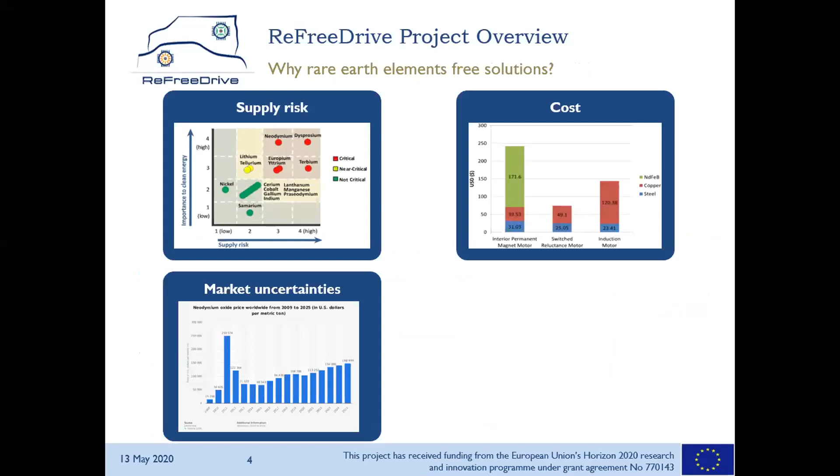Why are we so keen to avoid rare earth elements? Well, there are supply issues, there are cost issues, there are market uncertainties, and nevertheless, there are environmental LCA issues.

Supply risk: if we talk about rare earth permanent magnets for electrical vehicles, on the upper right we see the 2 elements, neodymium and dysprosium, which are the main elements used in today's permanent magnet machines. But they're not only for electrical vehicles, they're also highly important to other green technologies like wind turbines, so there's increasing demand all over the place. And on the other hand, the supply base is very much limited and concentrated in Chinese hands. Over 95% or even more is coming from China.

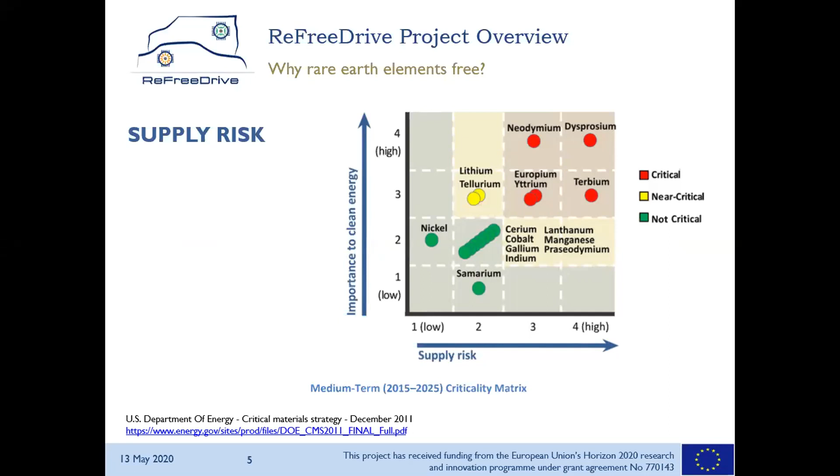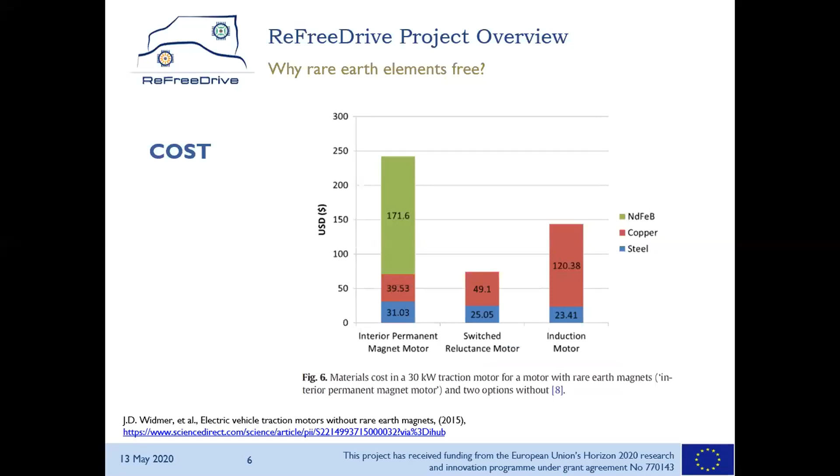The costs are an issue, obviously. So the cost proportion, depending on which study you're citing, is a significant part of the total motor costs.

There are market uncertainties, which are even more important than the absolute cost. We had a price peak in 2011 for neodymium dramatically, because Chinese export supply abroad was periodically stopped or limited. So there's high uncertainty how this can evolve and how this can affect long-term supply contracts.

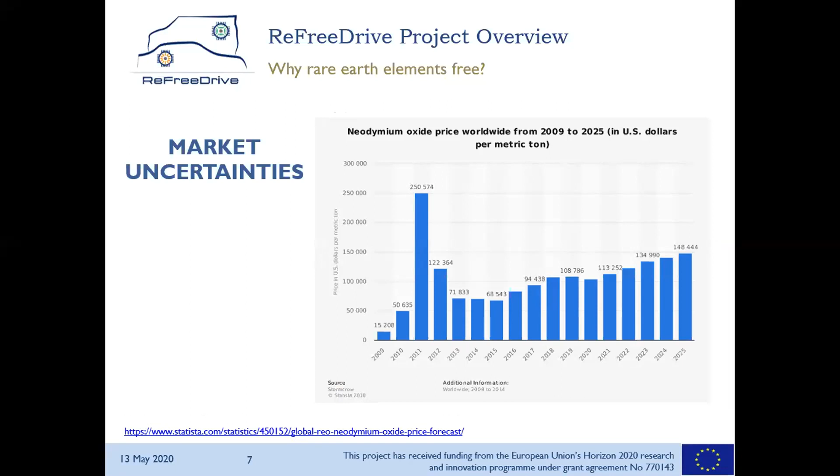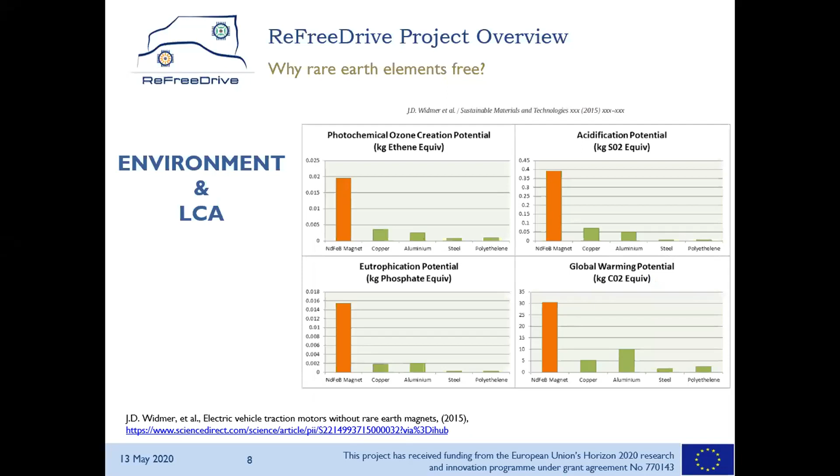And nevertheless, there are the environmental and LCA issues. These elements like neodymium have a high global warming potential, so a relatively negative CO2 footprint, and there are other issues like recycling and recovery still unsolved.

But of course you can ask, okay, what about other elements? Do we run from one criticality, avoiding neodymium, to another criticality if we put more copper into the motor? Well, short answer: no. Copper is not a critical material. Today, you see it on the right side of the chart.

There's at least 30% of copper coming from recycling, from the secondary route. In some regions like Europe, this could easily go up to 50% or even more. There are still a lot of reserves, discovered reserves, but also a lot of resources and identified resources, which, according to geological analysis, provide up to 250 years of copper.

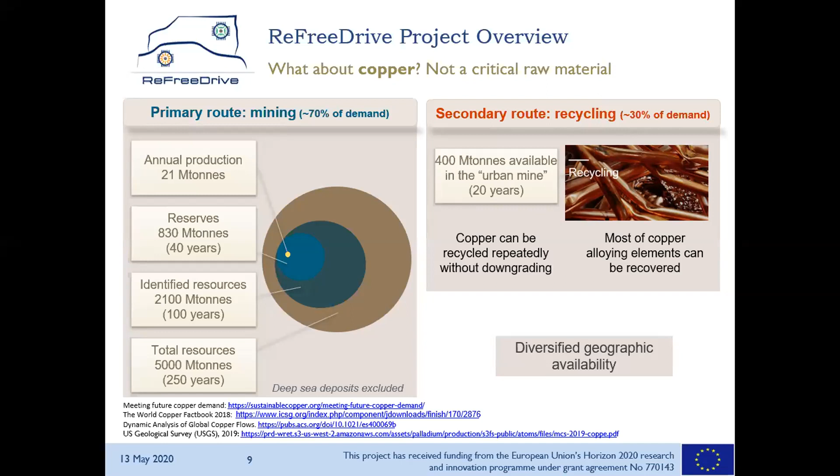The main objective of ReFreeDrive is not only to fulfill an academic task, but to prove that our solutions, which avoid rare earth elements, are industrially feasible, can be easily transferred to mass production, and ultimately also save costs.

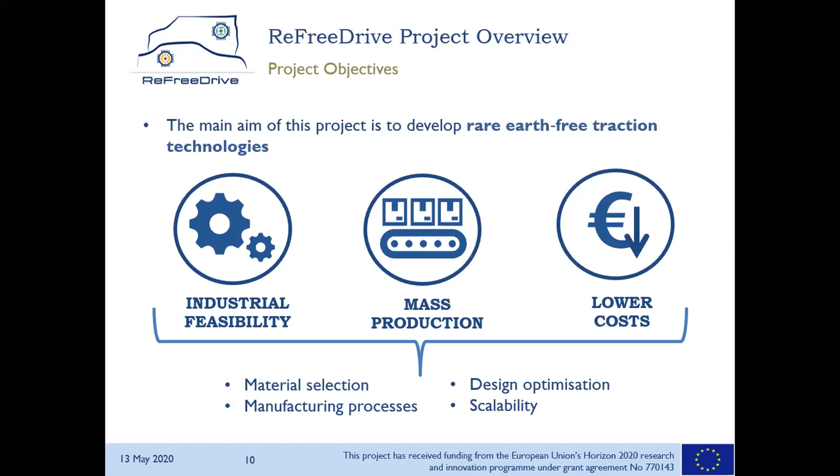We do this through clever material selection. We analyze the impact on the manufacturing processes. There is design optimization, which is the main topic today of the three speakers following. And we also intend to present a scalable solution.

In total, our project will develop and manufacture 4 different physical e-motor prototypes. There are 2 induction machines, one with a fabricated copper rotor, one with a die-cast copper rotor, and there are 2 versions of the synchronous reluctance machine.

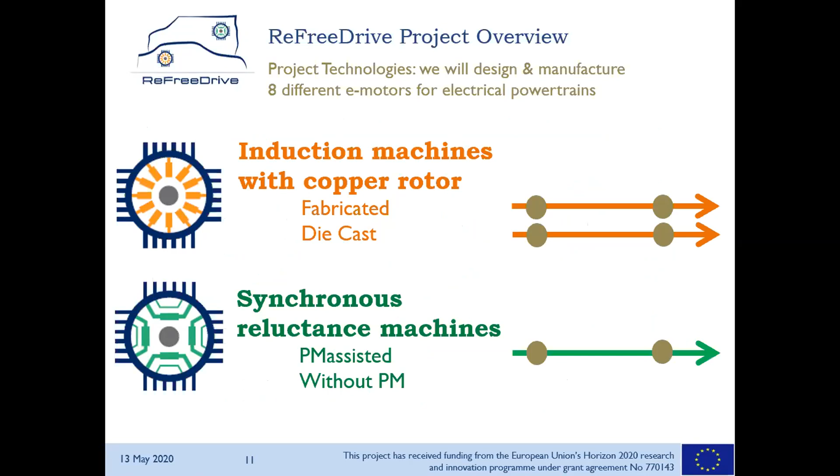One has a permanent magnet, but these are not rare earths, these are low-cost ferrites, so no critical materials. The second SynRel technology doesn't use any magnets in the motor core. And we will present the solutions for 2 power classes, 75 kilowatts and 200 kilowatts. As I said, our solution is scalable, so we could theoretically realize any power motor class in between.

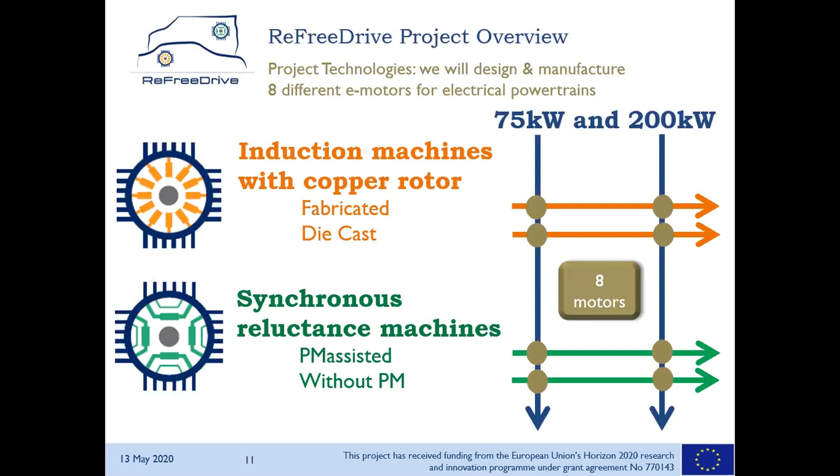Our main benchmark when developing the proposal for the project was the Tesla S60, which is an induction motor, but with a relatively high volume and a good awareness in the market. We intend to be 30% better regarding specific torque of the motors. We want to reduce the direct motor losses by 50%, meaning we're aiming for a motor efficiency of 96% plus.

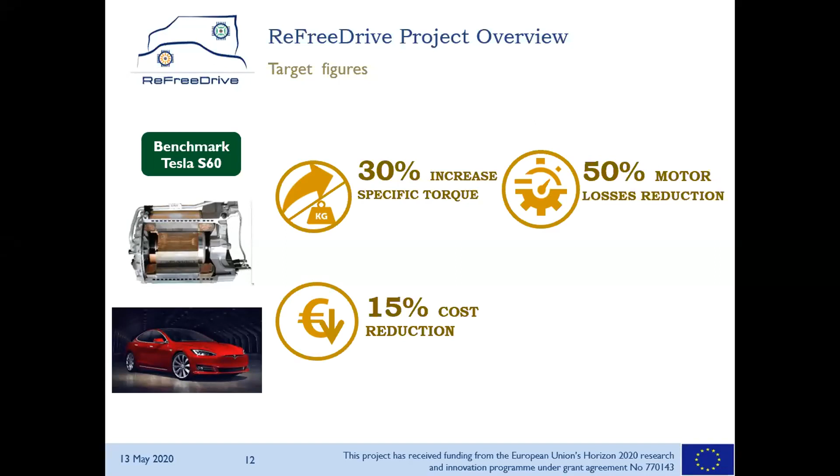As said before, cost reduction in mass production is an important issue. 15% is a target, and ultimately a 50% increase of power density in the power electronics, also to offer a relatively compact package.

Now, design optimization has been finalized. We have started to manufacture the 8 physical prototypes, which is somehow on hold, or slowly now going on. But all these 8 prototypes, induction and SynRel, 75 kilowatts, 200 kilowatts, will be then tested on motor test benches. And in a later stage, at least 2 of the 75 kilowatt motors will be integrated into a standard LCV and tested under driving cycle conditions at Perugia circuit in Italy.

We hope to show real test results towards the end of the year, in order to prove what the 3 speakers will now present as calculated performance also proves in real life tests.

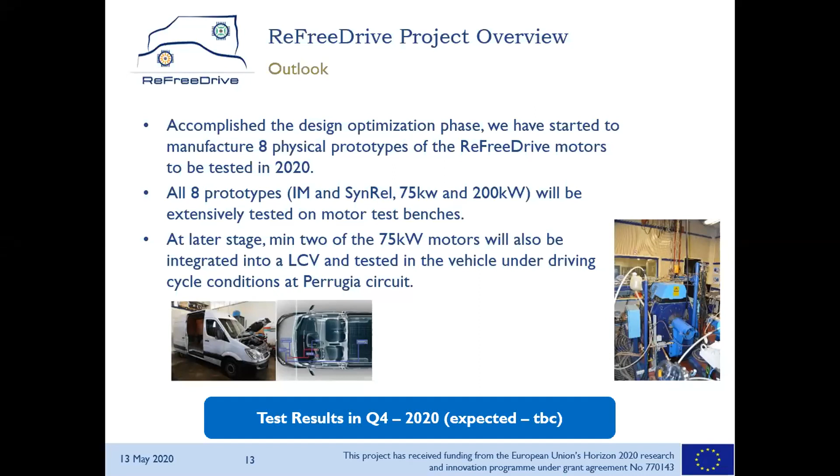You can find much more information, latest scientific papers we published, or presentations on our website, www.ReFreeDrive.eu, and also on the LinkedIn cluster page we joined with the other GV04 projects.

This is number 1 today of our planned webinar series. So we will talk about motor design. There are other topics on the agenda for further webinars: power electronics, the manufacturing process, the real test bench results, techno-economic analysis, and ultimately life cycle assessment. So stay tuned with us, and hopefully you can join one of the next webinars as well.

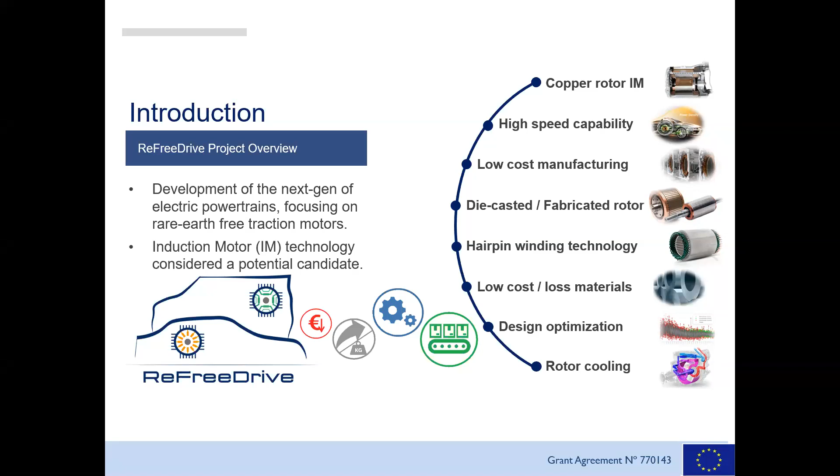Trying to maintain low-cost manufacturing, we looked at two possibilities to build the copper cage of this machine: one using a die casting procedure, the other a fabricated solution. For the stator winding, we decided to investigate hairpin winding technology, and I'll mention briefly why we did this, then look at different low cost materials. Last but not least, we optimized the design while also considering cooling of this machine.

These are the specifications valid for all the machine designs you'll see today. They are based on specifications coming from Jaguar Land Rover, the OEM partner in this project, and the target vehicle was this Jaguar XJ MY21 with the different performance requirements listed here.

Cooling as well, and power electronics. What is important to note, I'm not going to go through all the numbers, but it's important to note this value: peak torque 370 Newton meters, peak power 200 kilowatts, maximum operating speed up to 20,000 RPM, cooling system using liquid cooling.

In our case, it will be a water jacket with spiral cooling. And from the supply point of view, you notice we have the availability of a high voltage, 650 to 720 volts, while the current available from the inverter is up to 500 amps RMS. While the envelope of this design is listed there: diameter of 250 millimeters for an overall length of 325 millimeters.

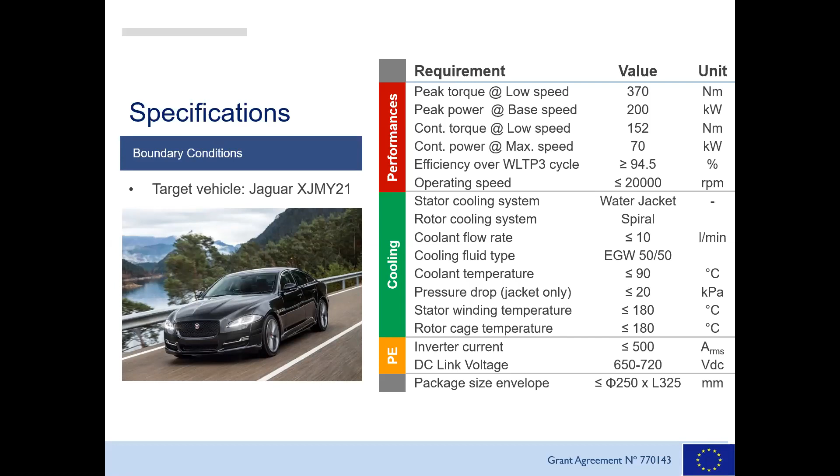Further, obviously, this project is supposed to improve upon the existing solution on the market, and we took as reference the Tesla 60S motor that is used in the Tesla vehicle, for which you can see the specifications given here: specific power, power density, specific torque density, and peak efficiency, and what we have to achieve with reference to the Tesla vehicle.

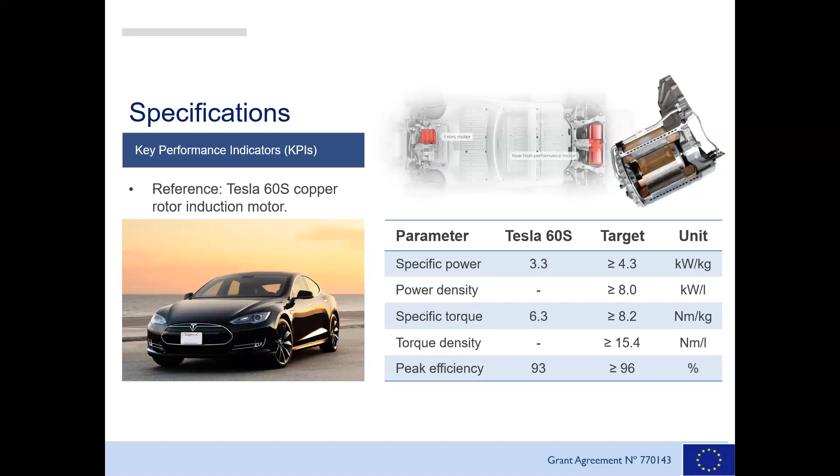So what we did to get our design, we made use in these calculations and optimizations of two tools, MotorCAD and OptiSlang. The reason for this is because they are fast and accurate, and will help us in getting an optimized design for this induction machine.

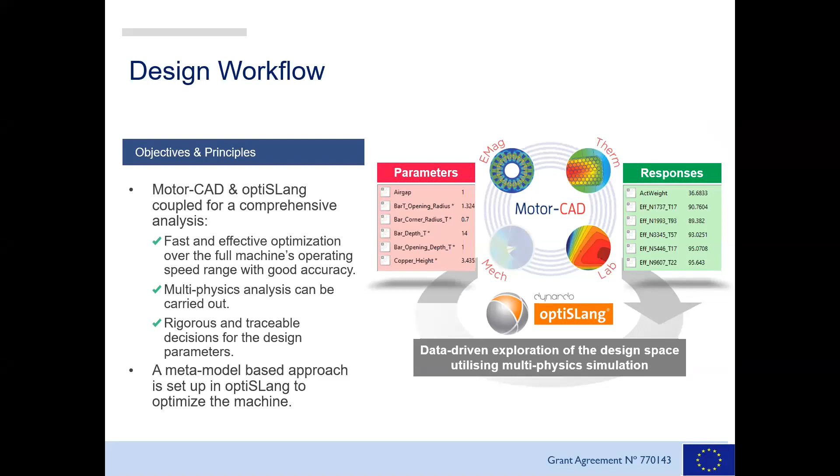The process is illustrated in this slide. We start by doing a sensitivity analysis. Based on this, which is point number 1, we get a meta model from which we can investigate the influence of different parameters on the performance of the machine. Then we optimize and get a solution that we validate using specific calculations, Motor-CAD validations, using the software mentioned earlier.

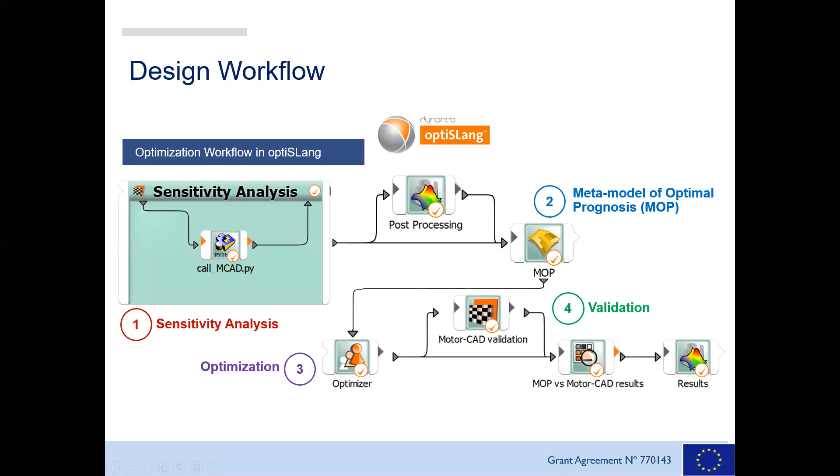So from the optimization design workflow, we have tackled and considered at the same time two aspects of machine performance: one is the electromagnetic performance, and the other one is the thermal performance.

How we model the performance of the machine: magnetically, we make use of the equivalent circuit given there, a standard T circuit. You can recognize the elements of a per-phase equivalent circuit for an induction machine, all of which are calculated using either analytical algorithms or finite element procedures.

From the thermal point of view, we made use of a lumped parameter thermal network given in that lower right diagram. For each candidate design, it takes about 10 minutes to calculate the performance, and the meta model was making use of 400 candidate designs, upon which we later generated an optimization solution.

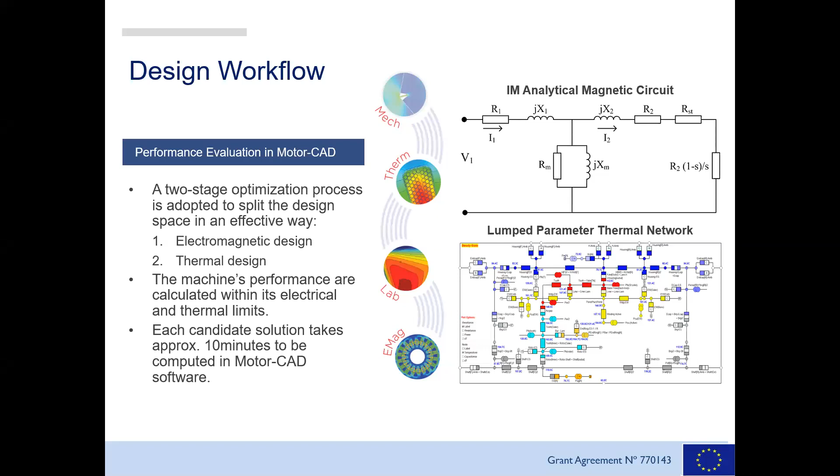Because we are discussing an automotive application, we have to consider a certain drive cycle, and in our case we decided to make use of the WLTP3 drive cycle. This is a world harmonized duty cycle recognized worldwide. And how did we make use of this drive cycle?

This drive cycle has 1,800 points to consider, so it takes a lot of computational effort to take all the points into account. So we decided to pick a few clusters. You notice from the color code, we picked one point for the high-speed solution in the pink area, another point for medium, one here at low rotational speed. And as well, we considered two other points at a relatively low speed, but with medium and high torque demand.

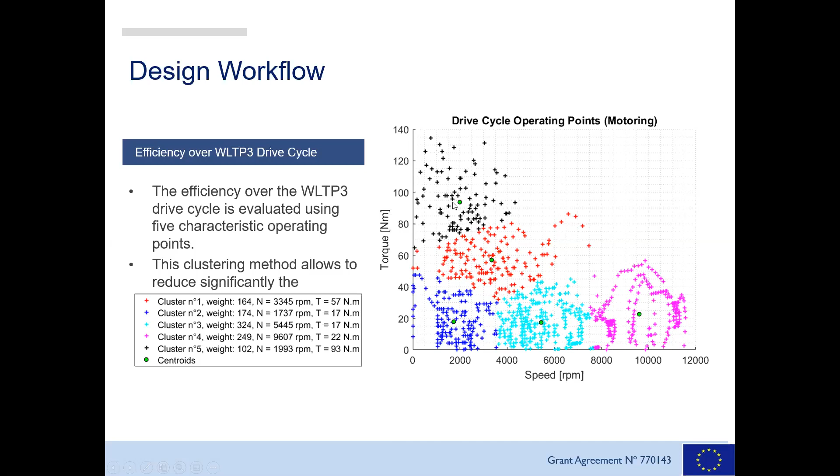Then from the electromagnetic design point of view, you can see on the screen right now the solution we selected in the end. It's a 4-pole machine with 36 stator slots and 50 rotor bars. The rotor bars are closed, while for the stator, you notice they are all parallel slot because we are going to use hairpin winding.

For the design of this machine, we investigated and considered different electrical steel materials given there, from thin gauge steel NO30-15, which is 0.3 millimeter thickness, NO20, 0.2 millimeter thickness, M235-35A, which is 0.35 millimeter thickness, and M290-50. Based on this analysis, we selected the M235-35A, given as well on this slide, as the final solution for the electrical steel.

For the copper materials, obviously the winding is made of pure copper. But for the rotor cage, two materials: copper ETP for the die-cast solution, and copper silver with 0.04% content of silver for the fabricated rotor cage.

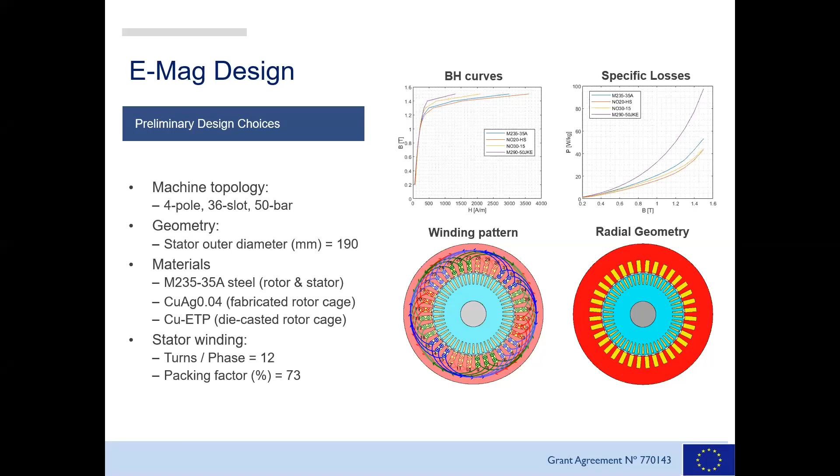From the magnetic point of view, to optimize the design, we considered certain parameters to optimize, and they are given here. You notice we look at the active length, mechanical air gap, split ratio, which is the ratio between stator bore and stator outer diameter, slot depth ratio, width ratio, bar opening depth, bar depth ratio, bottom bar, and top bar width ratio, with images illustrated on the right-hand side of the screen.

Important to note, in optimization it's important to use these ratios to make sure that all the geometries are feasible.

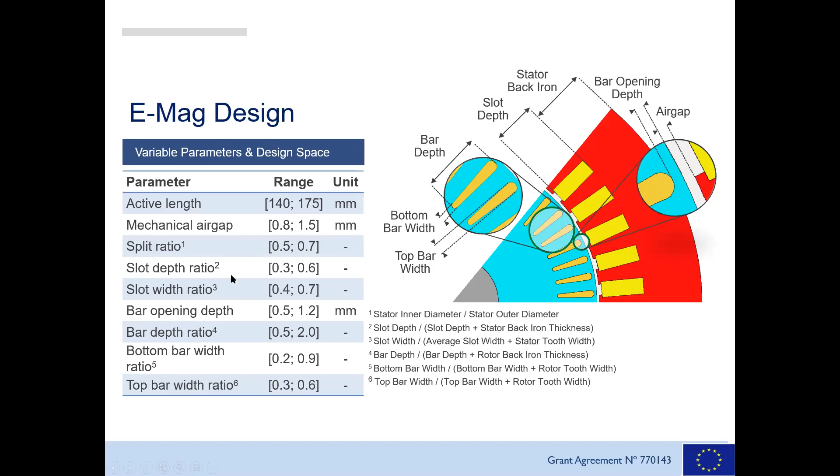And these are the results from the magnetic point of view. What you see here are efficiency maps, torque versus speed with the efficiency loci on the left-hand side, and power versus speed on the right-hand side. We noticed that we achieved the torque demand without any problems.

The required 200 kilowatt maximum output power is achievable for quite a large speed range, from about 5,000 RPM all the way to 15,000 RPM, with a short peak up to 300 kilowatts. The maximum efficiency for this drive cycle was just above 95%.

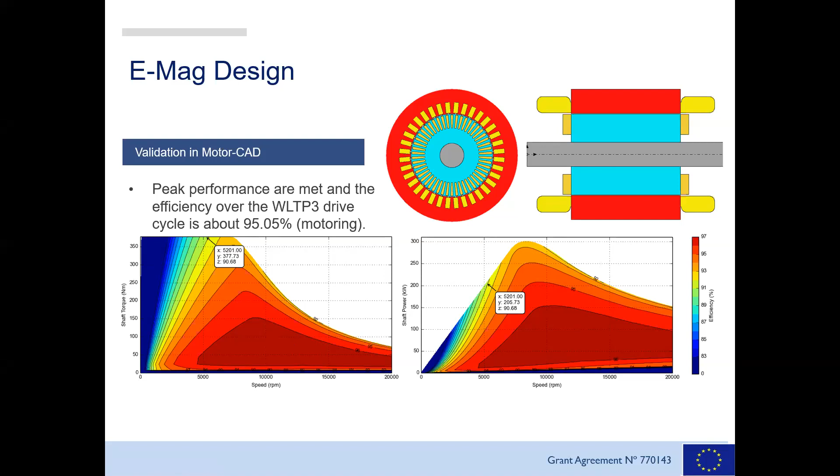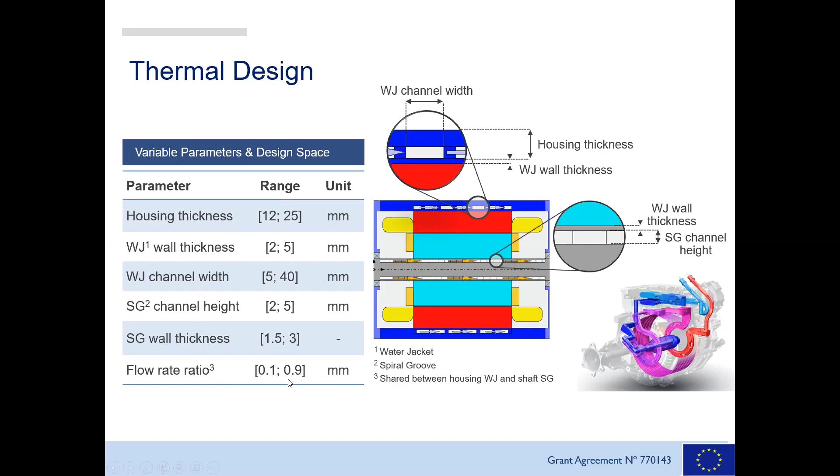So there's a series connection between the two cooling systems using water ethylene glycol mixture, 50-50%, while arranging these parameters: housing thickness, water jacket wall thickness, channel width, spiral groove channel height—this refers to the shaft cooling—and the flow rate ratio.

The thermal design was giving us what you see now on the screen. This is what we call continuous performance, meaning that the machine is capable of delivering the performance without exceeding 180 degrees centigrade for the stator winding and 200 degrees centigrade for the rotor bars.

You notice that this machine is capable of delivering continuously a peak torque of just above 160 Newton meters and continuous power of above 120 kilowatts.

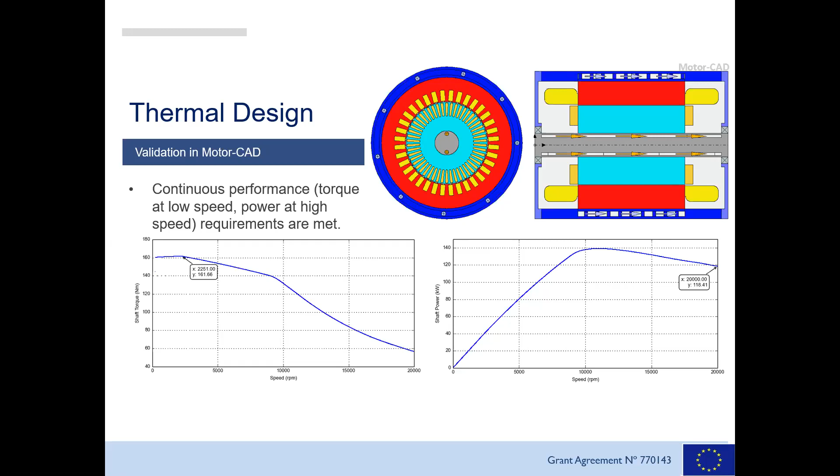On the prototyping, we are making good progress, even given the actual conditions with the coronavirus. The consortium still managed to build different elements of this machine.

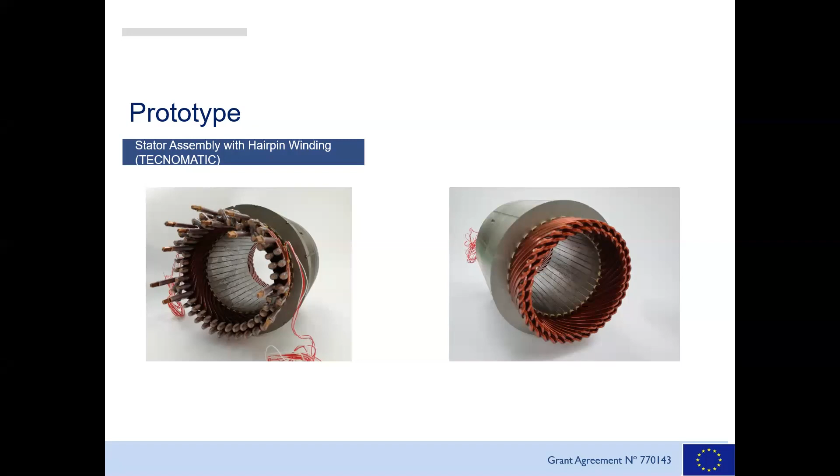What you see here is the stator assembly with hairpin winding, courtesy of Tecnomatic. It's a winding with 4 conductors per slot, and you can see we have also installed thermocouples so the temperature of the machine can be monitored.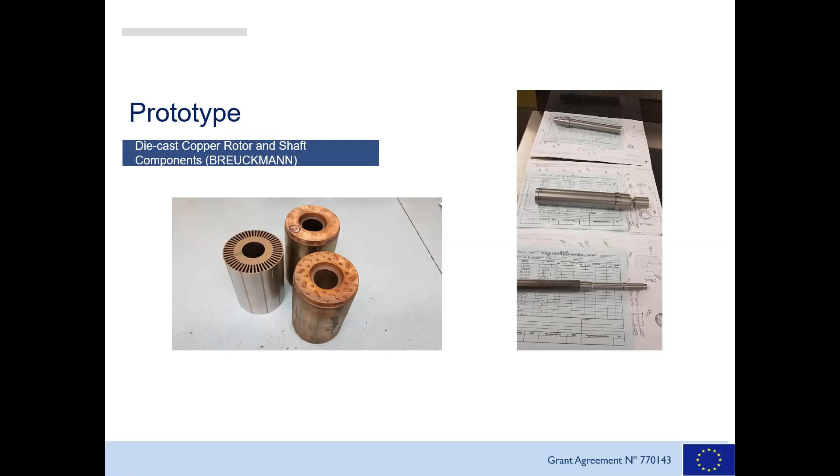Conclusions: we looked briefly into a solution for a 200 kilowatt peak power, 20,000 RPM copper rotor induction machine for a traction application. Optimization was achieved using ANSYS MotorCAD and ANSYS Suite software, and the solution comprises hairpin winding, die-cast fabricated copper rotor cage, and a series cooling fluid circuit for the shaft, stator, and inverter box.

The optimized motor is currently being prototyped, and hopefully we'll be able to test it later this year. The same design can be scaled for a 75 kilowatt, 12,000 RPM version for integration in a lower power vehicle powertrain.

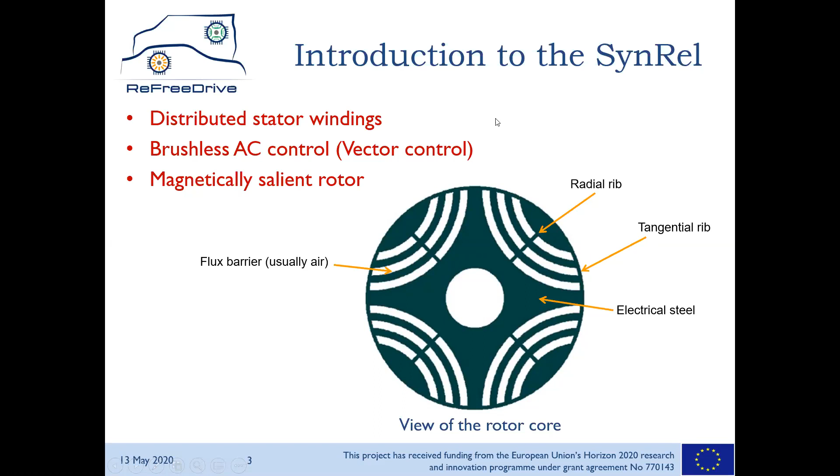Therefore, to satisfy the high requirements imposed by the application, it is necessary to achieve high magnetic saliency. The synchronous reluctance motor could be a valid alternative for electric and hybrid vehicles due to its simple and rugged construction. It has been selected as a rare earth-free motor solution for the next generation of electric powertrains.

The general advantages of the synchronous reluctance motor are the absence of windings and magnets in the rotor, allowing low inertia and good acceleration performance, and less cooling requirement, because the losses in the rotor are smaller than in other types of machines.

Moreover, it is attractive from an economic point of view, making it very suitable for household and consumer appliances because it's easy to manufacture. The disadvantages with respect to permanent magnet motors are a lower power-to-weight ratio and a lower power factor. It requires an accurate design to reach very high performance, and there is complexity in control.

Like permanent magnet motors, it requires a field-oriented control, but it has a non-linear torque-current behavior.

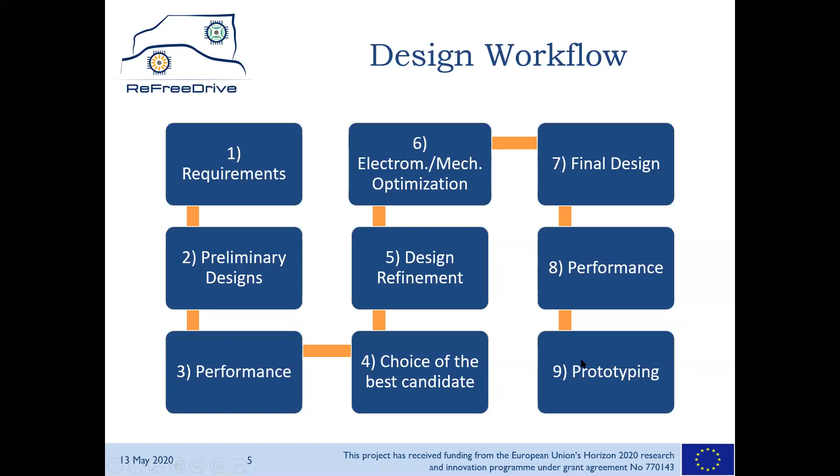The requirements are based on the Tesla Model S, with an increase of 30% of the performance. The requirements are the same as those my colleague showed in the previous presentation, but it is worth noting the high specific peak torque and peak power for this type of motor, the synchronous reluctance motor.

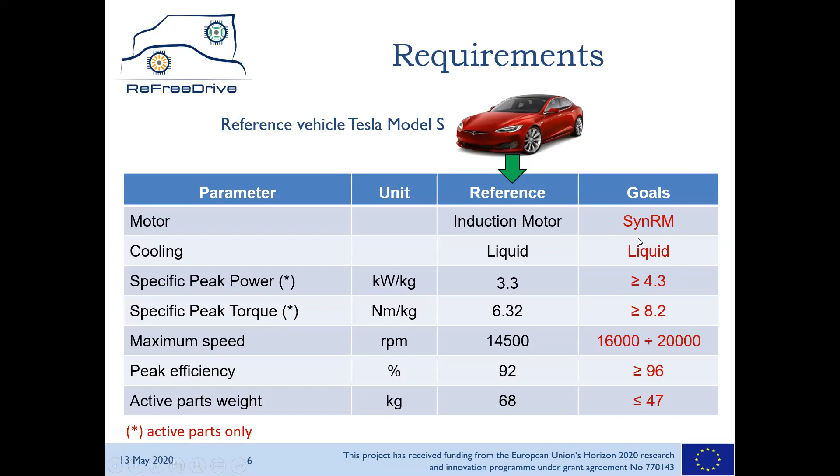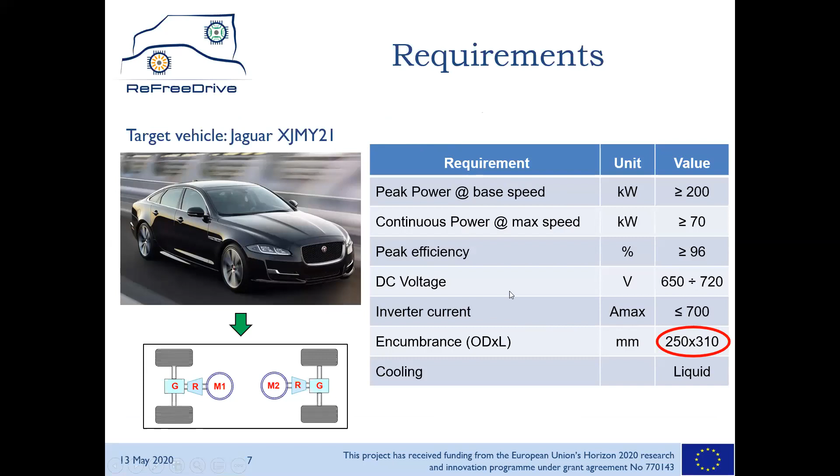To reach these severe requirements, the fluid shape barriers have been chosen to improve the overall performance of the motor, because they offer a very good saliency ratio and reduce the torque ripple. Moreover, the fluid shape is easy to optimize since it requires fewer variables, because it is already an optimized shape.

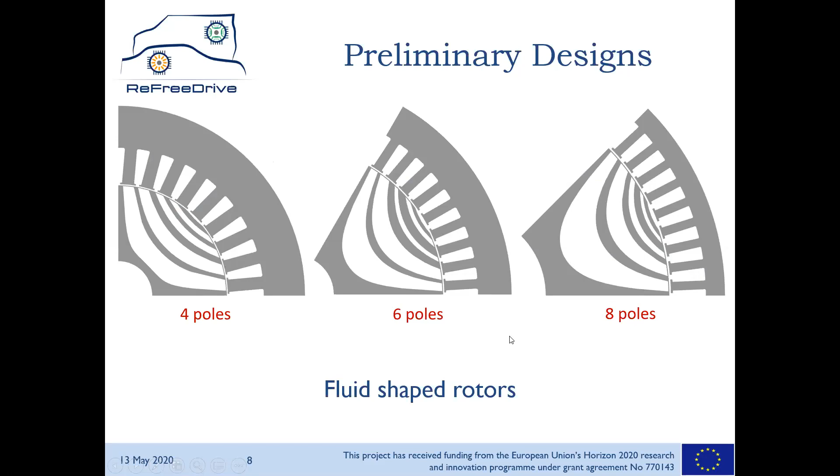The six-pole solution has the highest peak power at base speed of 280 kilowatt and the highest continuous power at maximum speed of 110 kilowatt. Its efficiency is in the middle of those of the 4-pole and 8-pole solutions, with a value of 97.6%. For this reason, the 6-pole solution has been considered the best candidate for further refinement.

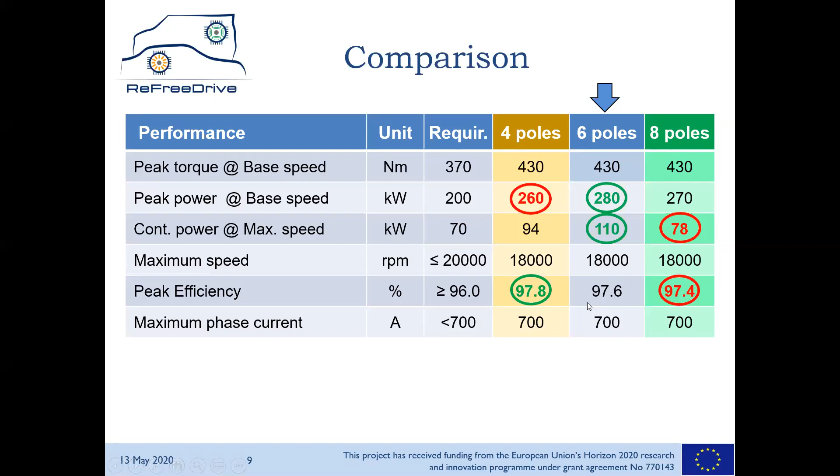In order to guarantee the structural integrity at high speed, radial ribs have to be introduced. The introduction of radial ribs degrades the performance of the machine. Larger are the radial ribs and tangential ribs, and lower is the saliency ratio of the machine, and so higher the degradation of the performance.

In order to minimize the mass of the tangential and radial ribs, guaranteeing the structural integrity, a topology optimization is used. The topology optimization is a tool commonly used in mechanical design that is able to minimize the material needed to withstand the mechanical load.

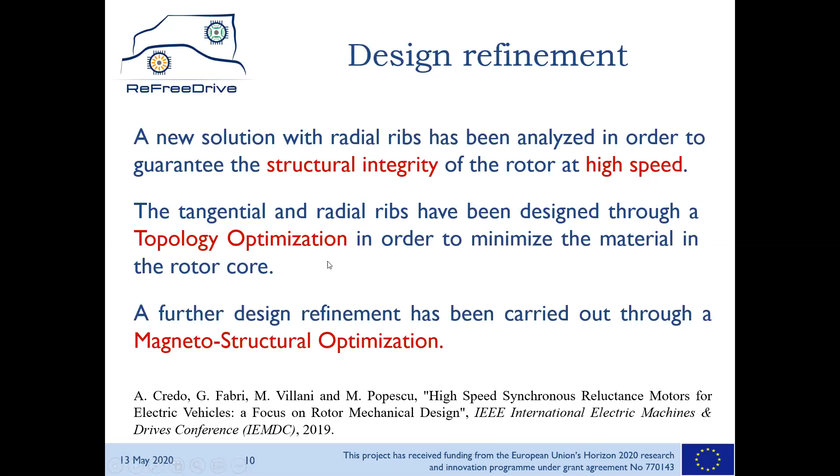The study of the topology optimization has been carried out on the 6-pole design. A further magnetostructural optimization has been carried out on the shape obtained by the topology optimization. The results of the process has led to a new rotor layout with asymmetric shape and multiple ribs in different positions with respect to the flux barriers. These multiple ribs connect the segments to each other axially and transversally. It is worth noting that this procedure leads to a quite unusual design compared to those reported in literature.

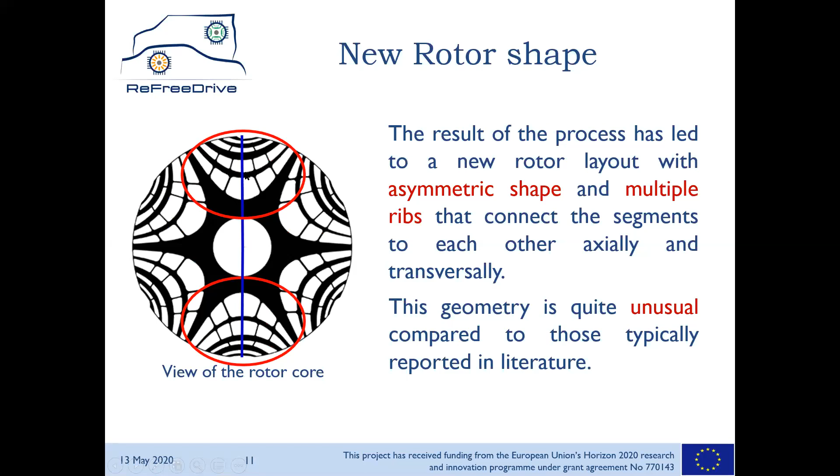The final design is able to satisfy all the requirements. The specific peak power is widely satisfied, and the specific peak torque is satisfied with a value of 8.4. The mass of the active parts and the peak efficiency are also satisfied. The active parts weight is 46 kg, and the peak efficiency is 96.4%.

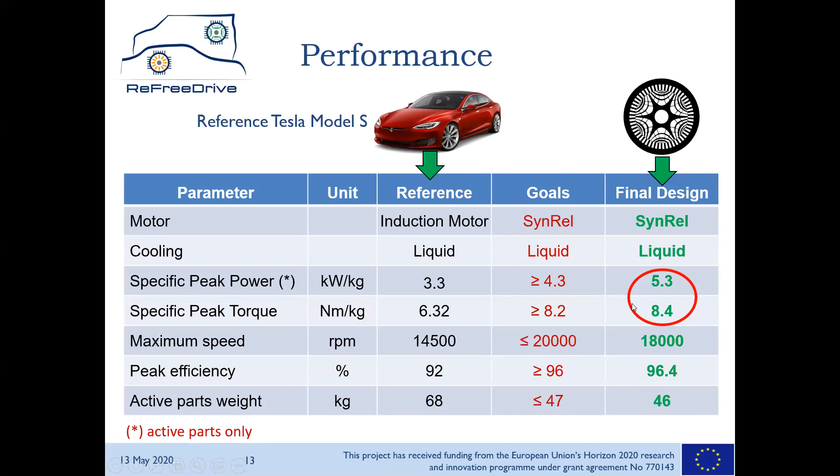The torque ripple is low, considering the type of machine, 4% in the peak power operation and 10% in the continuous power operation at the maximum speed. The skew angle is set to the angle of the stator slot.

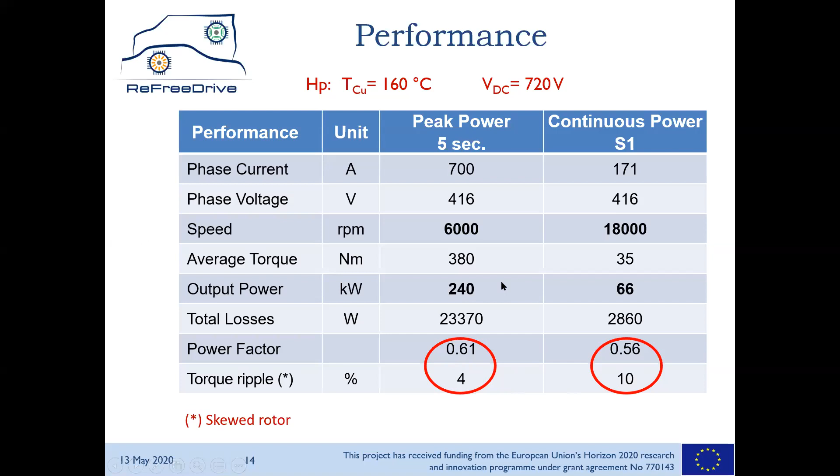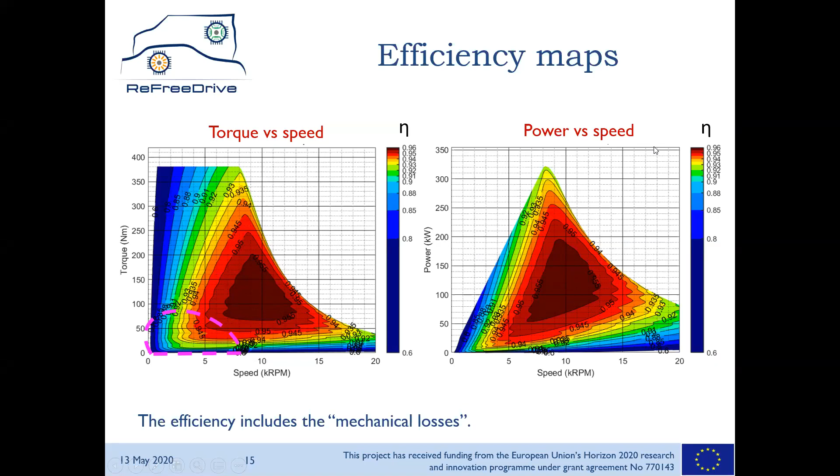The tangential ribs work in a bad direction with respect to the centrifugal forces, and the topology optimization has moved the radial ribs from the center of the barrier toward the tangential ribs in order to help the mechanical integrity. The ribs maintain enough mechanical integrity in the rotor structure when rotational forces are applied at high speed, 18,000 RPM, satisfying the mechanical limits of the chosen electrical steel.

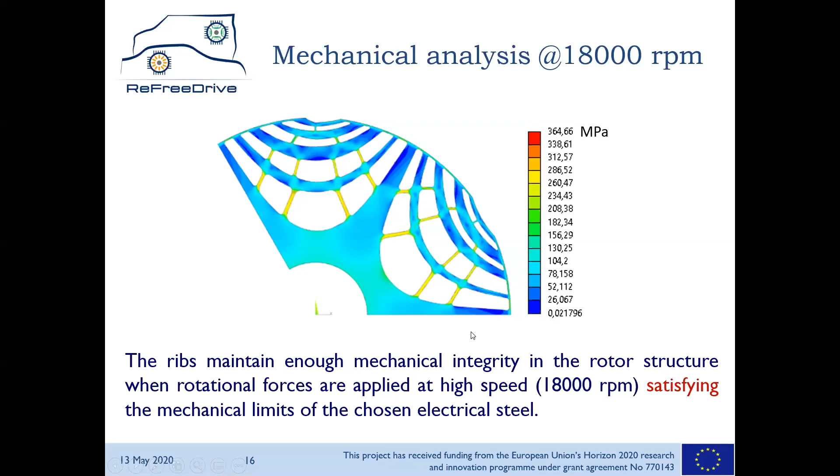The lower power machine, the 75 kilowatt, has been scaled from the 200 kilowatt design only by changing the stator winding and the stack length, but using the same housing. The 75 kilowatt solution has a lower bus DC voltage and a lower speed. This scaled version will be integrated on the vehicle powertrain for performance testing.

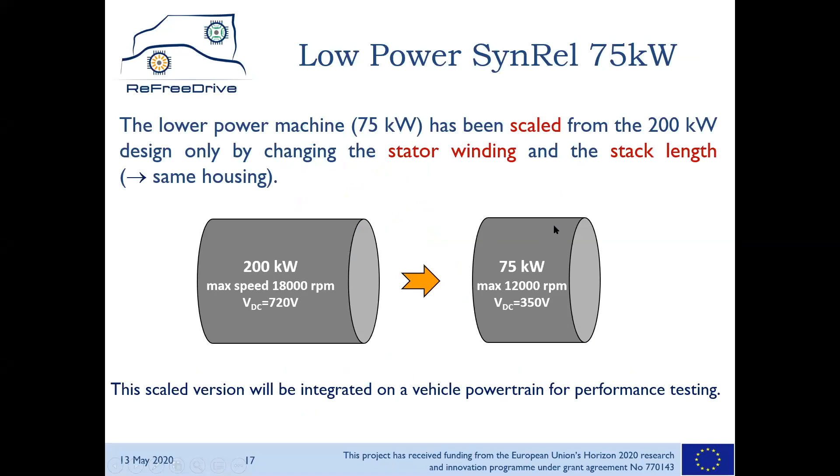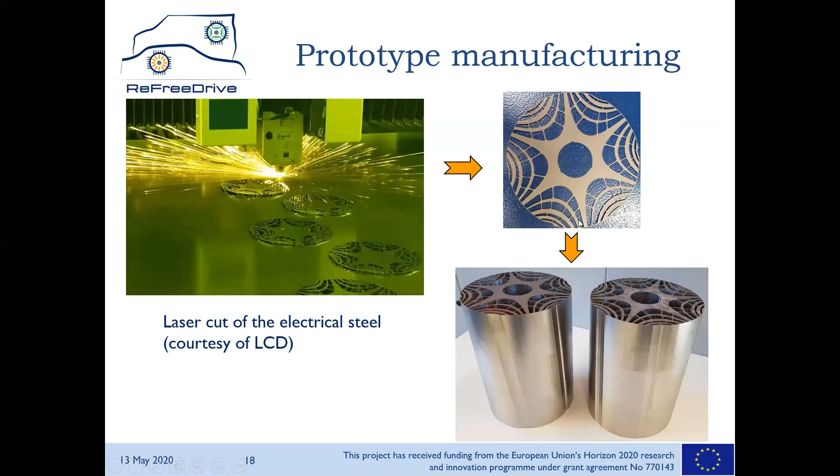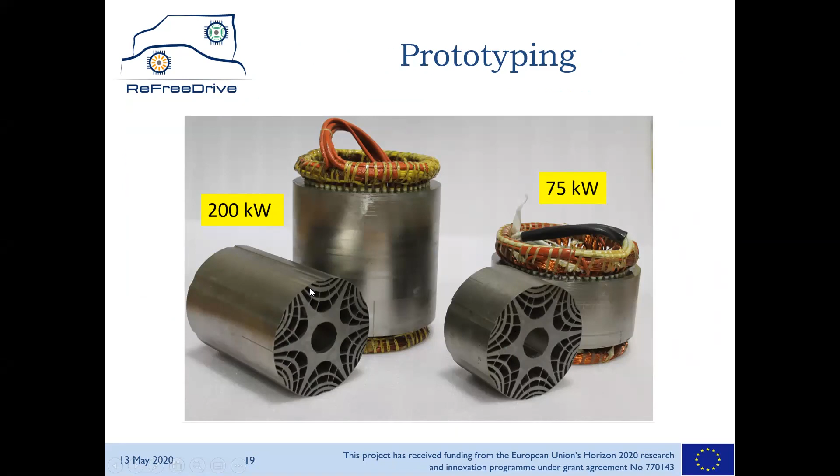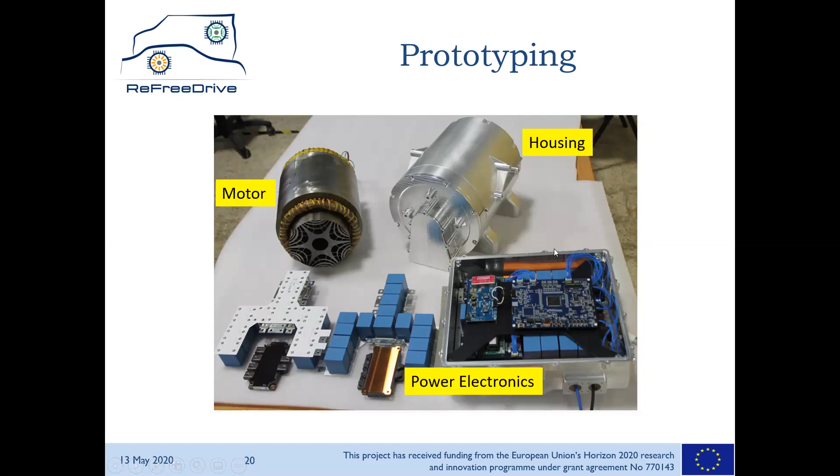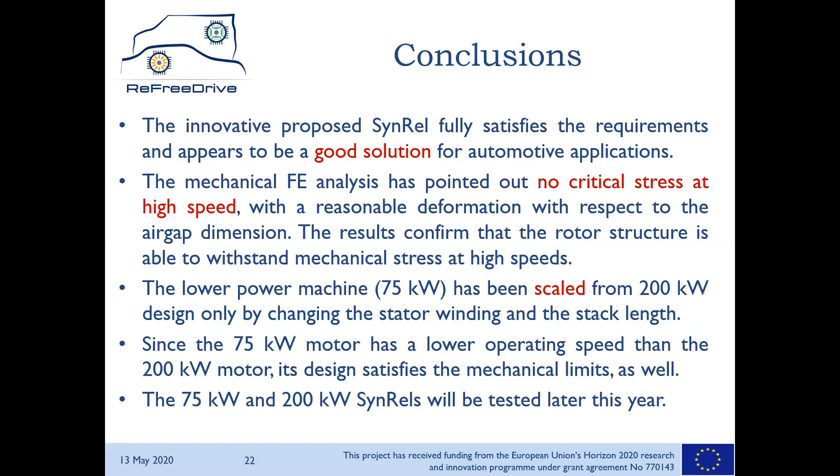Thank you for your attention.

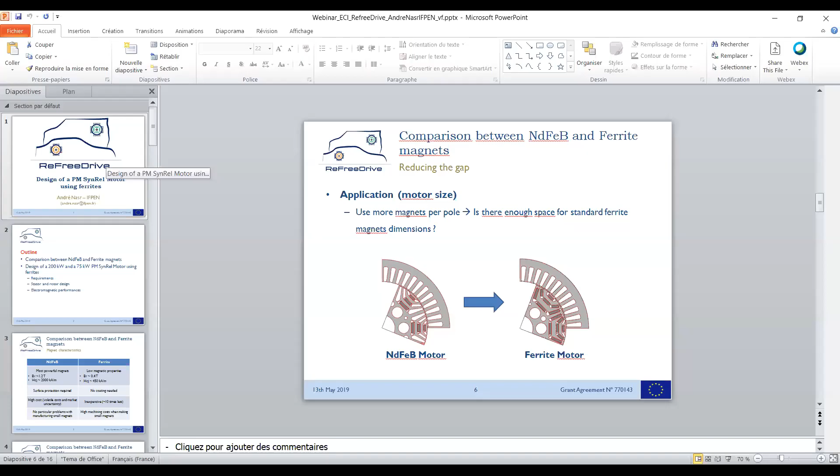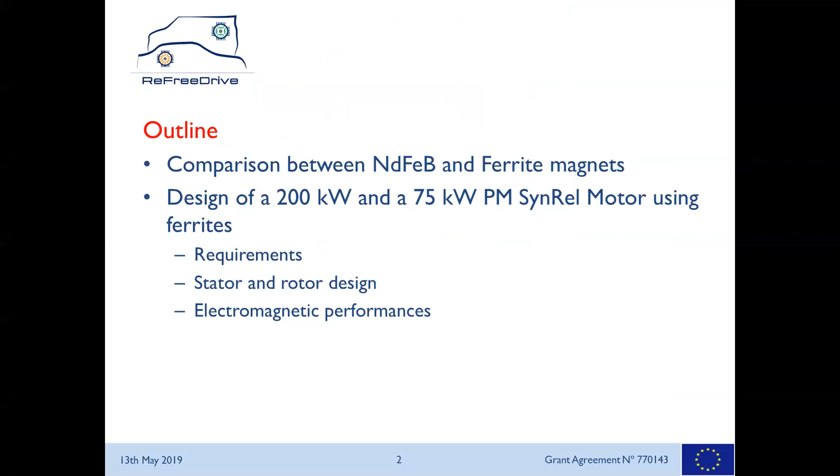So let's begin by comparing the characteristics of neodymium and ferrite magnets. We all know that neodymium are the most powerful magnets in the market today, with an average Br of 1.2 Tesla. They also have a high coercive magnetic field, the Hcj.

On the other hand, ferrites have relatively low magnetic properties, with an average Br of 0.4 Tesla. Comparing with neodymium magnets, we have 1/3 of the Br. They also have much lower coercive magnetic field. Having a high coercive field value means that the magnet is more resistant to demagnetization. One advantage for ferrite magnets is that they don't need any surface protection, unlike neodymium magnets that need such protection to prevent oxidation.

But maybe the biggest advantage of ferrite is their price. We all know that ferrites are inexpensive compared to neodymium magnets. They may cost 10 times less than a neodymium magnet.

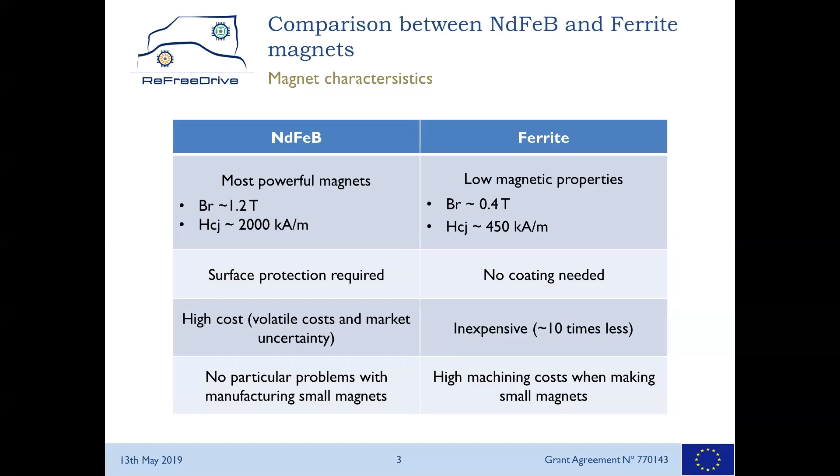As we have seen in the previous slide, a neodymium motor will always have better electromagnetic performance than a ferrite motor. But the question is, how can we reduce this gap in performance? The answer has actually two parts: the first part is about the motor technology, and the second part is about the application itself.

We all know that a synchronous reluctance motor has reluctance torque, which is torque without using magnets. In such a machine, almost 60% of the total torque is reluctance torque, and only 40% is torque generated from magnets. On the other hand, if we take the SMPM motor, we have 100% magnet torque.

So if we do a small comparison, if we want to use ferrites in both motors, we can clearly see that we will have a higher impact in the SMPM motor. So yeah, we should choose the right technology. Motor technology is very important when we want to use ferrite magnets.

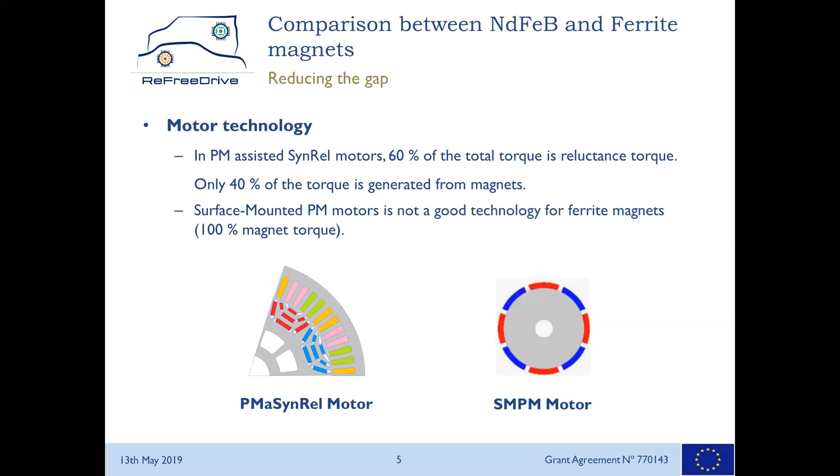And concerning the other part of my answer, it is the application, and it is more about the motor size. Let's take an example. If we have a reference motor which was designed using neodymium magnets, and we want to design an equivalent motor using ferrites instead.

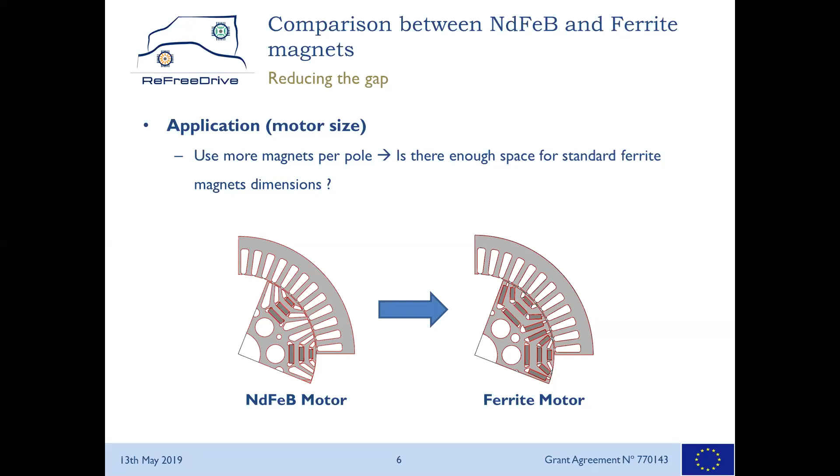The problem is when the motor is small, the size is small, we need to use small magnets, small ferrite magnets. And as I have already mentioned, when we want to manufacture small components, small ferrite magnets, the machining costs are much higher compared to neodymium magnets.

So as a conclusion of this couple of slides, we can't use ferrites anywhere we want. We should really pick the right motor technology and also the right application.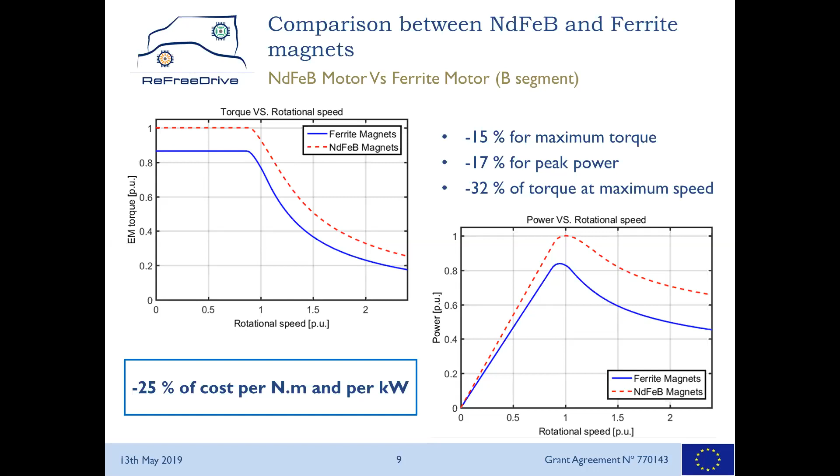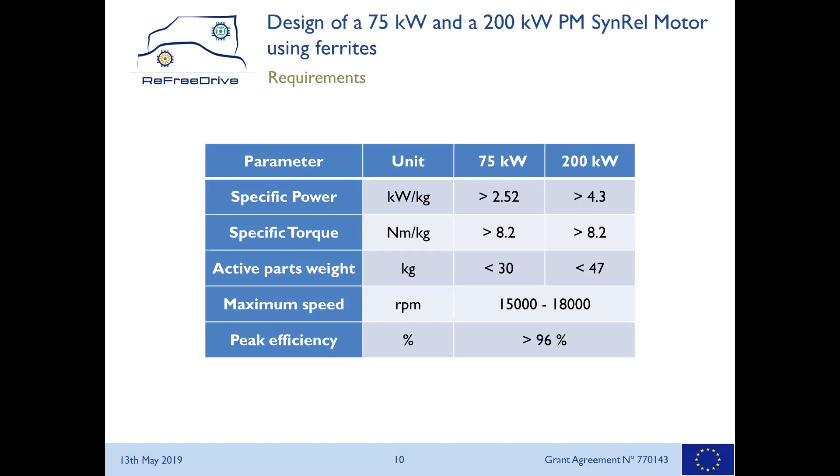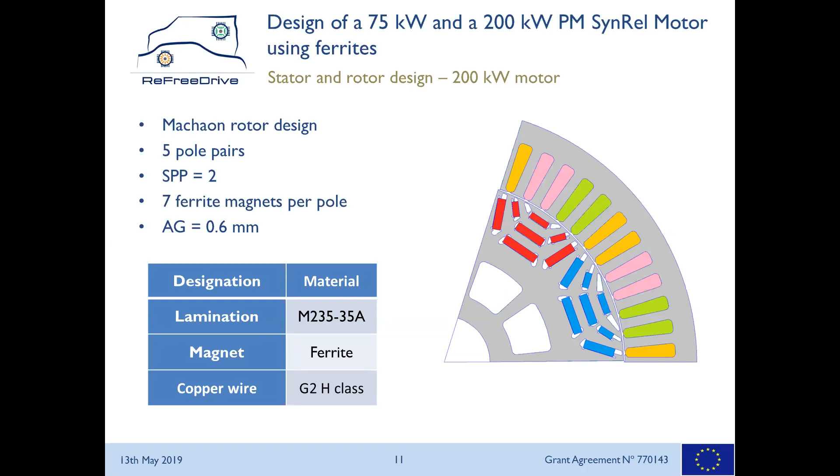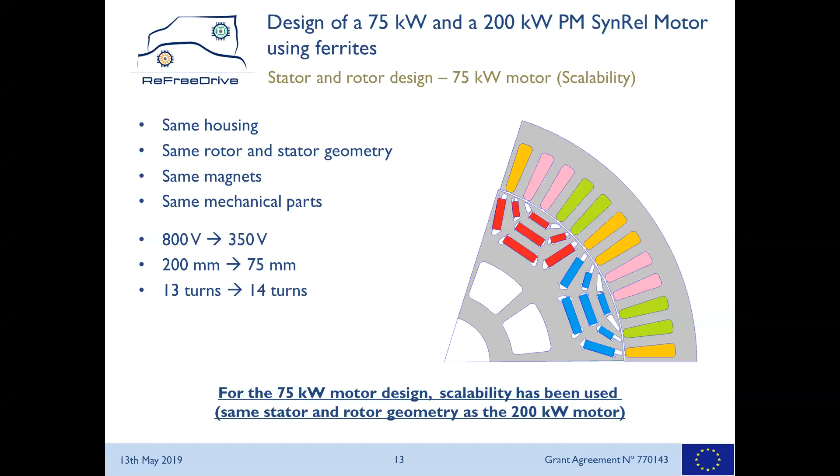Once again, I present here the performances of this motor. We have a maximum torque of 148 Newton meter, 88 kilowatt for the maximum power, and a maximum efficiency of 95%. You will also find on the slide the weight, the specific torque, and the specific power.

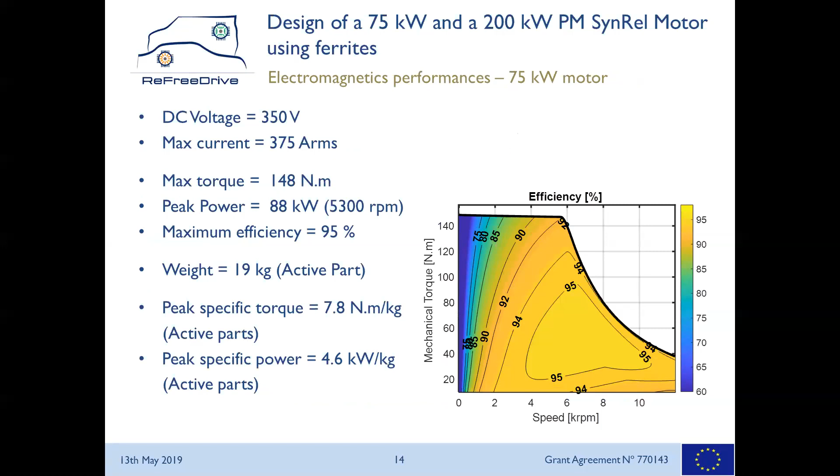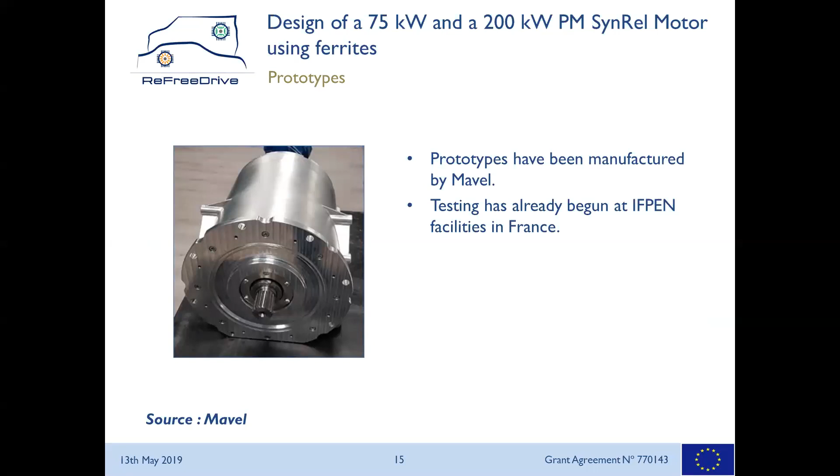So at the end of this presentation, just a word about the prototypes. All the prototypes have been manufactured by Mavel, and the testing has already begun at IFPEN facilities in France. Thank you all for your attention.